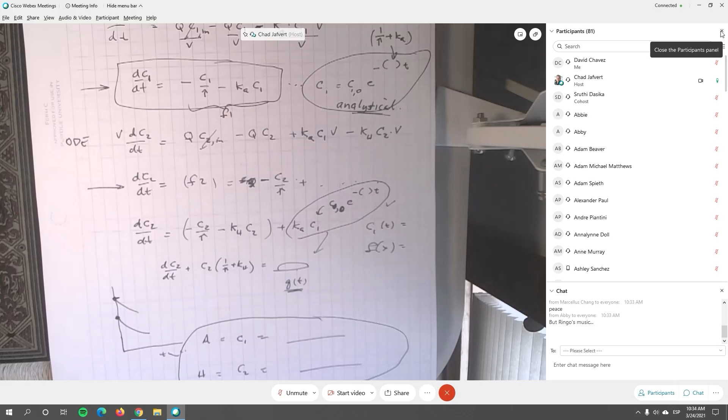We went over basically how to do the homework. We almost took two days to do it, but I wanted to ask if you guys have any questions about that before we continue. If you got any homework questions, I can answer them today before we get going. Anybody? I'll give you a minute if you're writing in the chat box.

You guys learning anything in this class? Yes. Yeah. Yes, that's a good sign. Okay, that's good. So I am teaching you guys something.

A lot of Excel stuff. Excel is very useful. You will probably, if you're working, doing any kind of data analysis, but even just calculations, you may end up using Excel a lot.

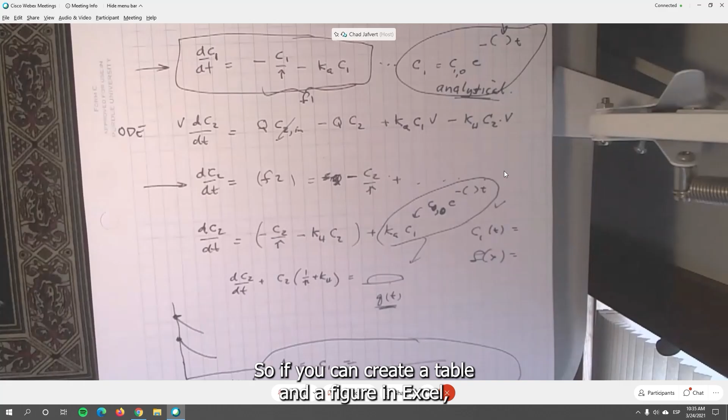The other thing you do as an engineer a lot is write. You have to write technical reports. If you go into academia, you have to write papers and other things, but you're always explaining what you're doing, and so you end up writing a lot and creating figures and tables and all of this stuff. So if you can create a table and a figure in Excel, you can export it into a Word file easily as long as you've created it the right way.

So a lot of what I've been trying to stress is presentation of data, so that you are good at that, because in engineering, that's a lot of what you do is presentation of information so that others can act on it.

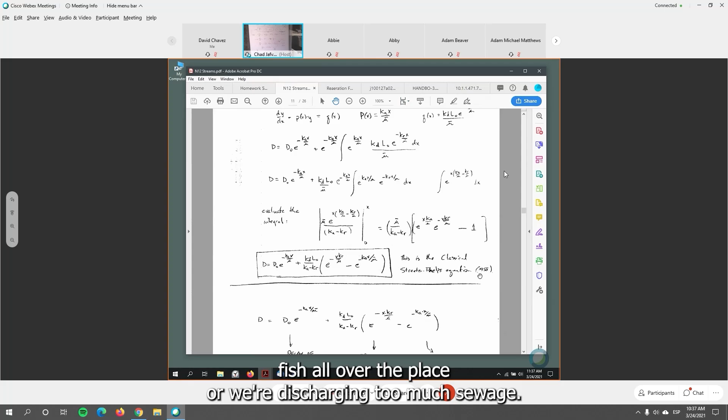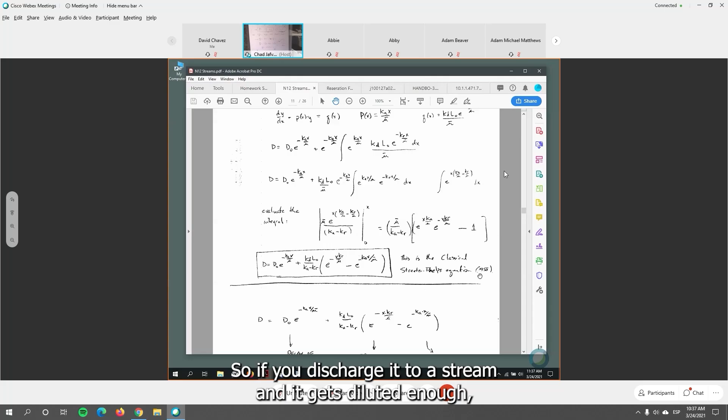And at that point, they had primary treatment plants. Primary treatment is just settling the solids that are in the wastewater, and the remaining water still has maybe 100 milligrams per liter BOD. So if you discharge it to a stream and it gets diluted enough, it may not kill any fish, but it's still not that great because it still stresses the environment quite a bit.

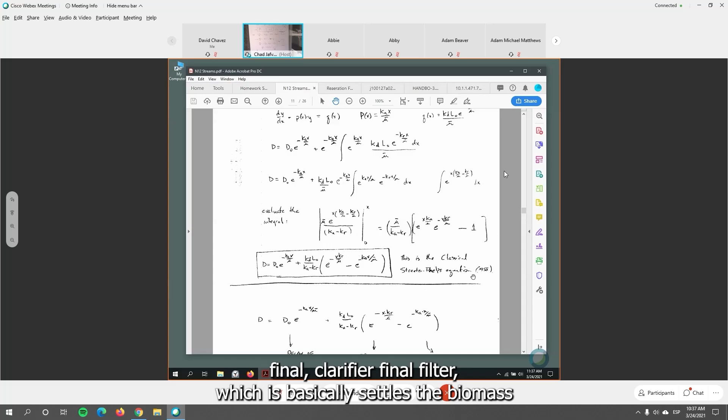So after the Second World War, that's when we started building secondary treatment plants with activated sludge to process it, and then a final clarifier, final filter, which basically settles the biomass, and then the water comes out fairly clear. It's still not completely treated because you can still have pathogens in it.

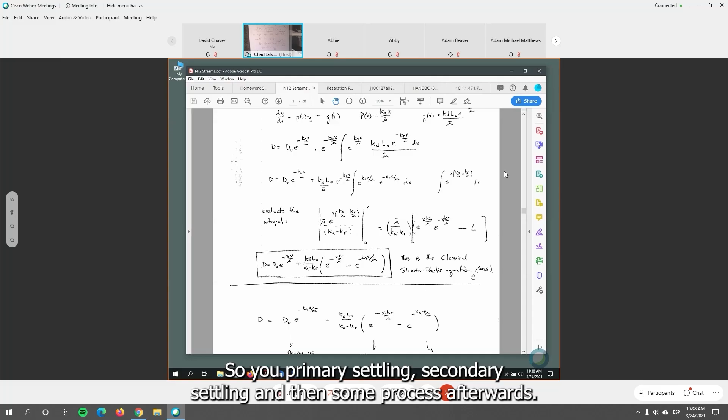So tertiary treatment is where you now disinfect the water or do some other treatment past just the secondary settling. So you have primary settling, secondary settling, and then some process afterwards. And now we have advanced wastewater treatment plants where we can even put reverse osmosis on as a final stage and then reuse that water for some purpose. In some cases, it can even be re-drinking the water that was wastewater.

What's the ad for Ivory soap? Anybody know? The original ad for Ivory soap. Let me Google. How do you spell ivory?

Purity. Ivory soap. Here we go.

The original Ivory bar soap was developed in 1879 by Harley Procter. It was developed with pure and purposeful ingredients, meant to be a staple in the home and mild enough to use as a whole family.

Ivory was pure, 99.44% pure to be exact. For years, they marketed this soap as being so pure because it's 99.44% pure. Remember that number.

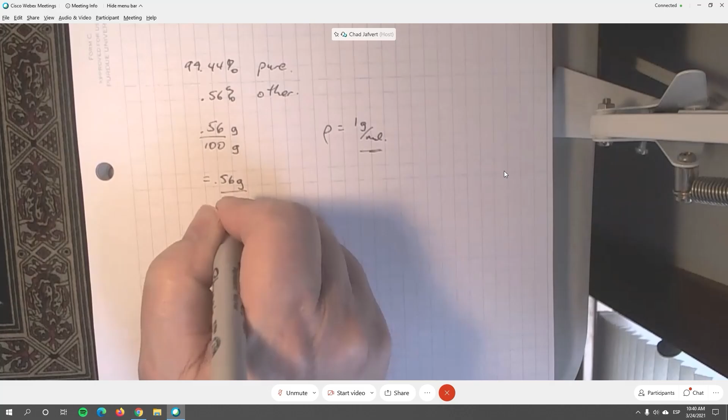That's 0.56 out of 100 grams, or if we know that the density of water is 1 gram per milliliter, we know this is 0.56 grams of other substance per 100 milliliters of soap or of water. Right now I'm saying let's convert this into a liquid phase, into a water phase.

If we had that much impurity in water, how much would it be? Well, in water, we would have 0.56 grams per 100 mLs. That's 5.6 grams per 1 liter, because there's 1,000 milliliters per liter.

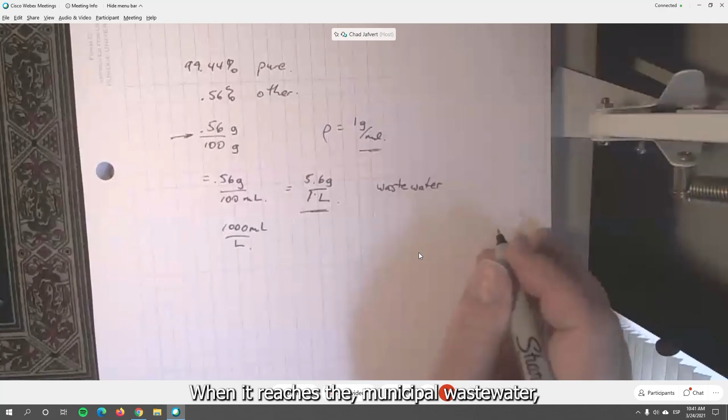So wastewater, when it reaches the municipal wastewater treatment plant, is typically 200 milligrams per liter as BOD. It's also typically 200 milligrams per liter as suspended solids, SS. So 200 milligrams per liter, look at the difference there.

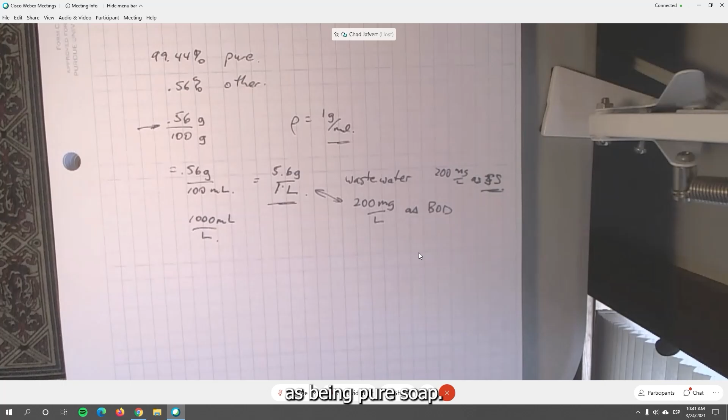It's kind of amazing because you think of Ivory soap as being pure soap. It's got some crud in it. It's got more crud in it than wastewater has waste in it.

As environmental engineers, we are working with trace quantities often. This is milligrams per liter. We're trying to get this down to about 10 milligrams per liter before we discharge it to the river.

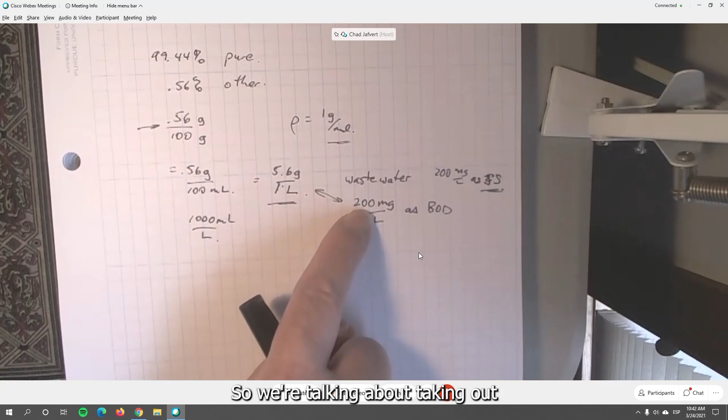So we're talking about taking out almost all of this BOD out of the water. Not quite all of it, but, you know, and in fact, our new phosphorus regulation is 1 milligram per liter, or 0.1 milligram per liter as phosphorus.

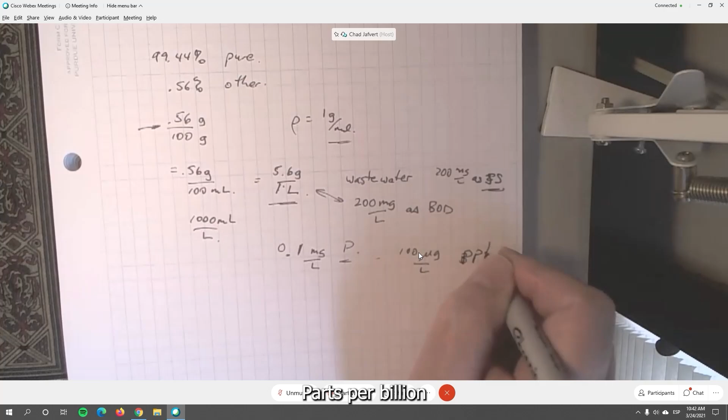We're talking, this now is 100 micrograms per liter, which is parts per billion. Milligrams per liter are parts per million, right? A milligram per liter is a part per million. Microgram per liter is part per billion. So that's 100 parts per billion.

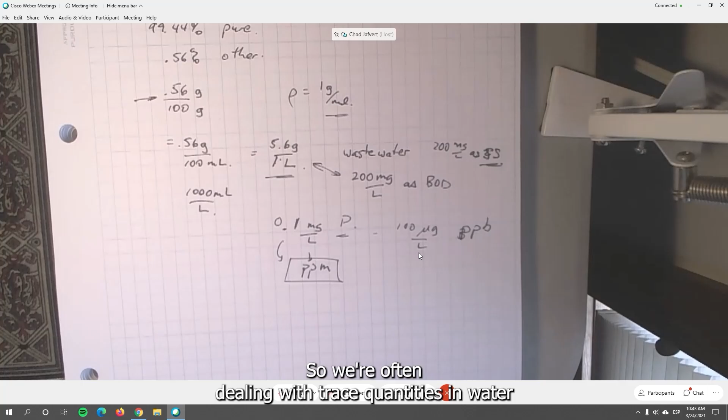We even go down to hormones in the environment that are nanograms per liter. And at those concentrations, they have effects on fish and other animals in the water. So we're often dealing with trace quantities in water that still can create problems.

So 200 milligrams per liter, yeah, that's actually quite a bit, but it's actually not as much as impurities in Ivory soap, which is claimed to be 99.44% pure.

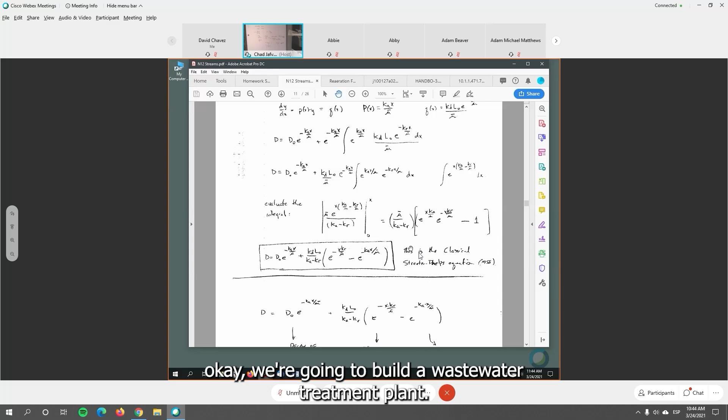So here, this equation, why was it developed? Because in science, the question is always, okay, we're going to build a wastewater treatment plant. How big do we need to build this plant? How much do we need to remove? What do we need to get the BOD down to?

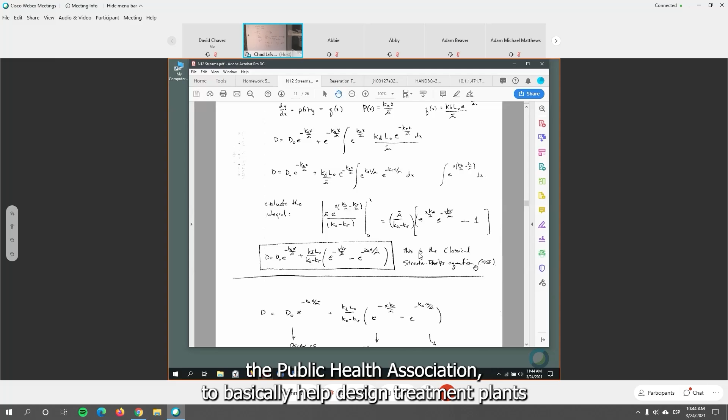And it comes back to this deficit question. How much deficit can we allow in the stream before we start killing fish or affecting organisms? So this equation becomes our first water quality model. It was the first model used by the precursor of the EPA, the Public Health Service, to basically help design treatment plants.

We say, okay, we have this much sewage going into the stream. This is the flow of the stream. This is the flow of the pipe of the sewage going into the stream. If we reduce our BOD, our L naught, going into the stream to this point, we will not create a large deficit in the stream.

And we can regulate it now because we have a model that says, hey, L naught affects the value of D. It's a function, D is a function of L naught. It's also a function of reaeration and these rate constants. So we have to estimate these rate constants too.

We also have to know about the flow of the stream, because we're interested in where this dissolved oxygen deficit occurs downstream. This is the classic Streeter-Phelps equation, developed by Streeter and Phelps, who worked for the Public Health Service.

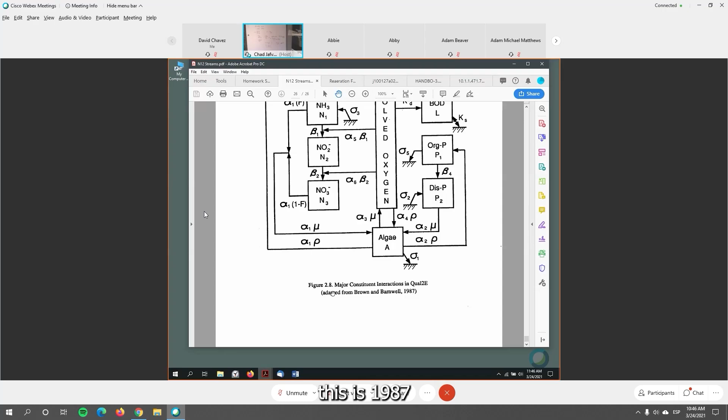Since that time, it's been modified and upgraded to include lots of things. In fact, in this handout on streams, if you go to the very last page, this is from 1987, 'Major Constituent Interactions in QUAL2E,' a river water model developed by Brown and Barnwell. These two guys worked for the EPA, actually in Athens, Georgia.

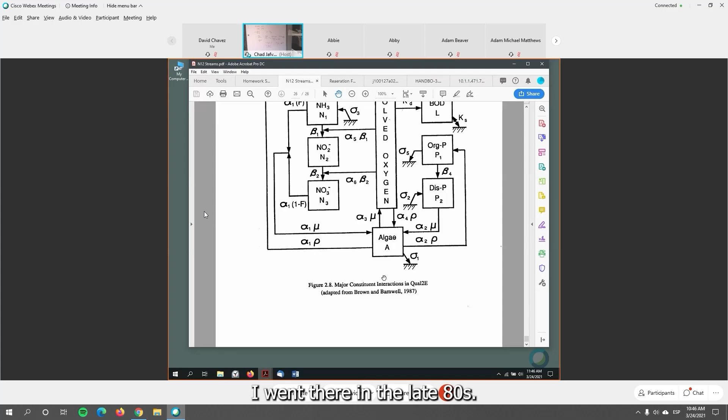They were still there when I got there, in the late 80s. So they were developing this model about the same time I got to the lab where they were working on it. It's basically an EPA model, QUAL2E, that states would use to determine, okay, if we're going to build a treatment plant, how big does it need to be?

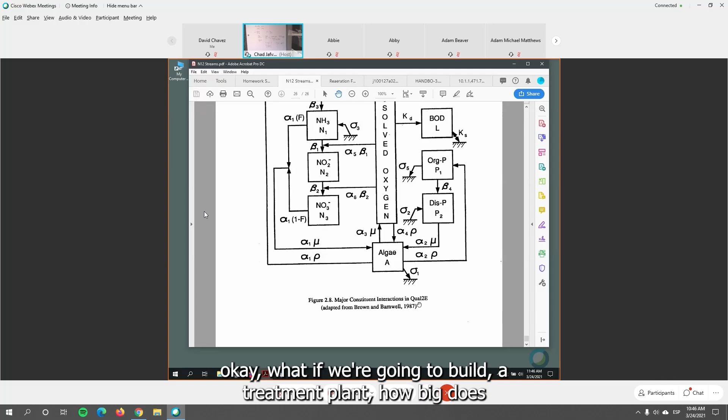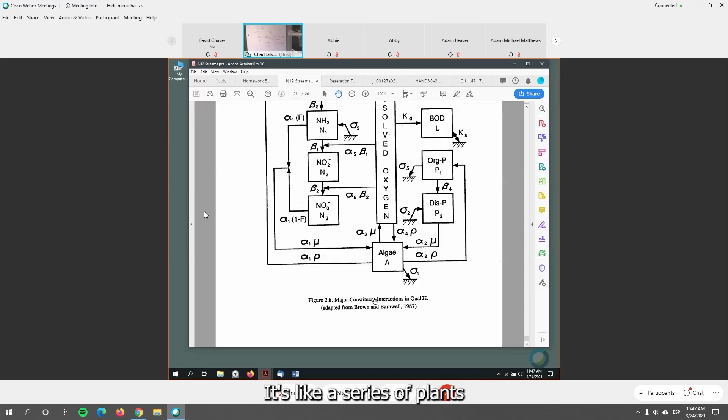It also allows you to do waste load allocation. If you've got 5 industries on a river all discharging to it, how much waste can each discharge? So it's not just one plant, it's a series of treatment plants along the river, and based upon flows and everything else, you can determine how much each one can discharge to the stream.

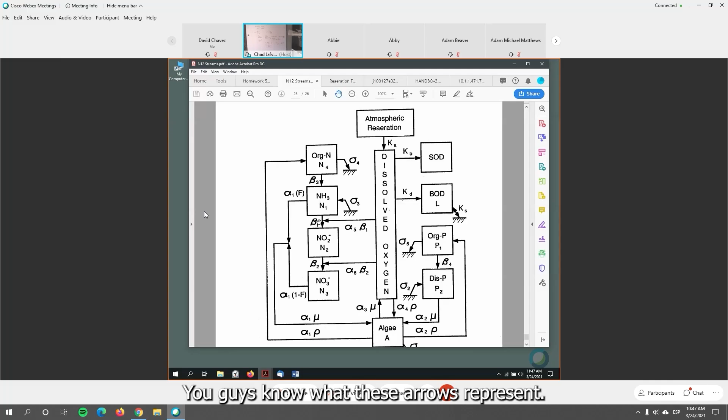If you look at this model, you see arrows. You know what these arrows represent—they represent kinetics. You know what these terms represent, these alphas and betas. They represent factors that affect this rate constant.

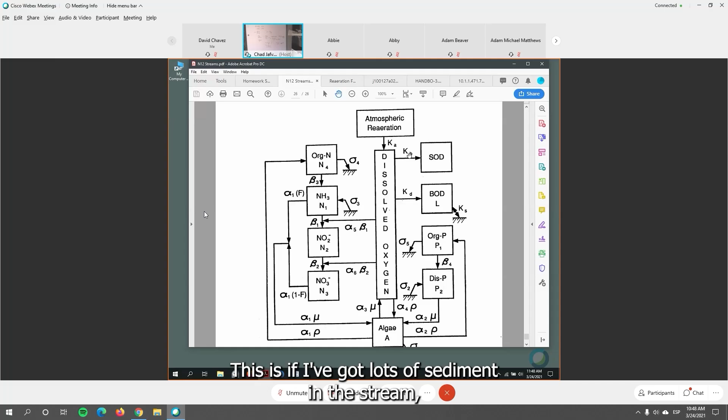Over here you've got some simple ones you already understand. KD is for BOD, biochemical oxygen demand. KB is for sediment oxygen demand—this is not settling BOD, this is if I've got lots of sediment in the stream, those sediments are taking up dissolved oxygen also.

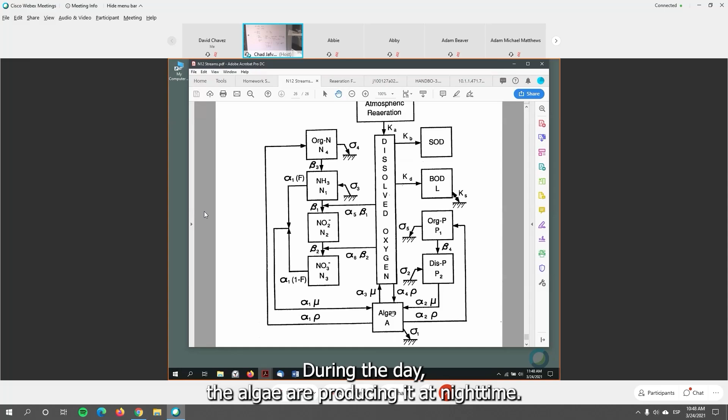Here's algae. They've thrown algae into this model because algae can produce dissolved oxygen, algae can respire dissolved oxygen, and they can uptake dissolved oxygen. So this is a diurnal transfer of oxygen. During the day, the algae are producing it. At nighttime, the net is—these are net because during the day they're both using and producing it—at nighttime they're not producing it, but they're still respiring.

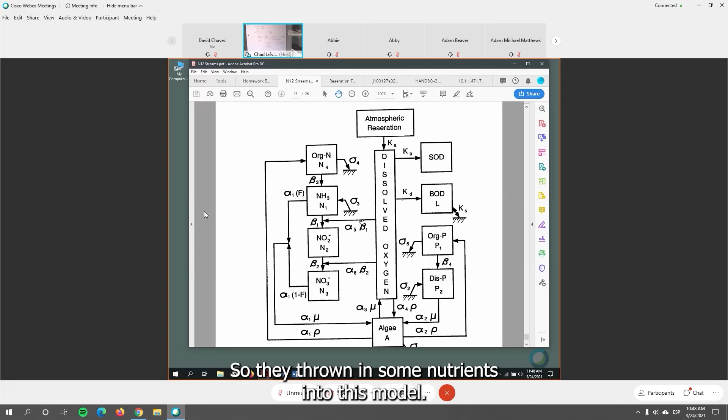Over here you've got nitrogen, over here you've got phosphorus—they've thrown in some nutrients into this model. And atmospheric reaeration, Ka. We've got Ka and Kd in our Streeter-Phelps equation.

The Streeter-Phelps equation is so simple because you only have this term, this term, and then also this term, Ks, which is BOD precipitating out—if it's solid particles, it will precipitate out. So we've got 1, 2, 3 of the rate constants from the Streeter-Phelps equation, only those 3, in this model.

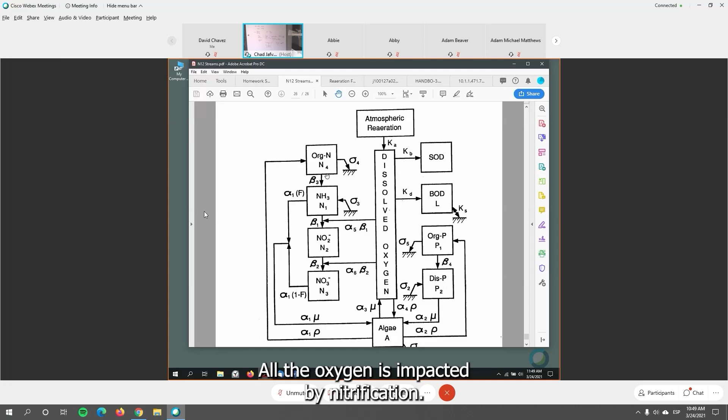But the model includes a lot of other things, because dissolved oxygen is also affected by nitrification, for example. Remember, this is carbonaceous BOD, but over here we've got ammonia being converted to nitrite, being converted to nitrate. These beta 1 and beta 2 are rate constants for that conversion.

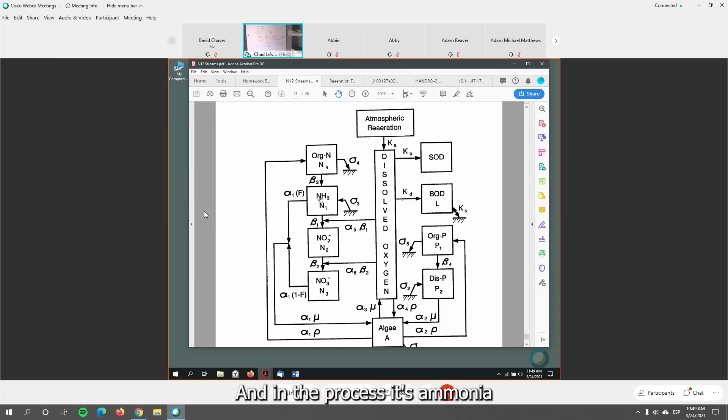In the process, ammonia plus dissolved oxygen forms nitrite. Nitrite plus more dissolved oxygen forms nitrate. And then algae take up the nitrate and grow, algae take up the phosphorus and grow. So algae are growing.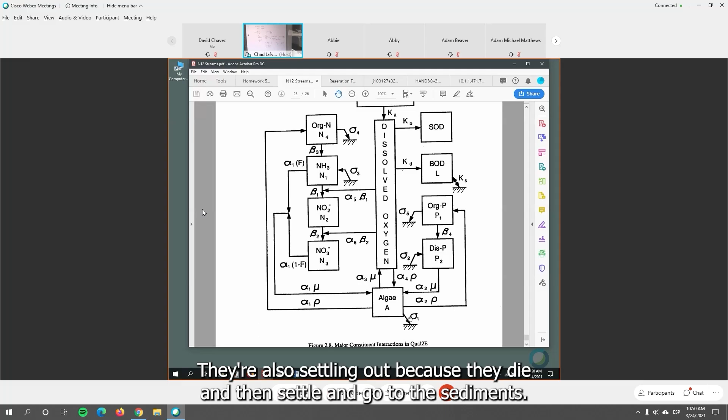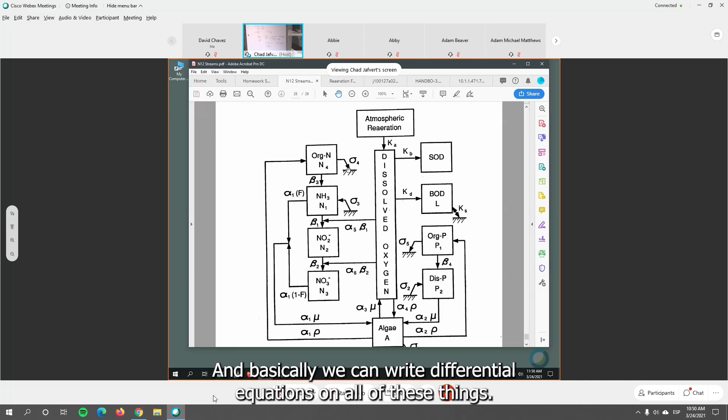They're also settling out because they die and settle, going to the sediments. So we've got a loss term here basically because of algae dying and becoming part of the sediments, the biomass within the sediments, and that creates some of this demand. So you can see this as a little schematic of all these rates, and basically we can write differential equations on all of these things.

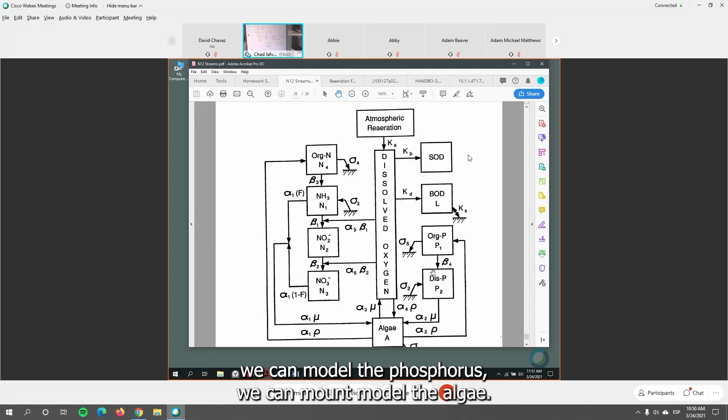So we can take the Streeter-Phelps equation, which has 1, 2, 3 terms, and expand on it to actually model not just dissolved oxygen and BOD—which is what we're doing in the Streeter-Phelps equation—but now we can model the nitrogen, the phosphorus, and the algae.

And in more complex models, let's take a more complex model—I was doing some things here on CAEDYM, Center for Water Research in Australia. Here's a basic model that it does, but it does a lot more fancier things than that. I'm always covering this up.

This is in New Zealand where they're using this model, and it just gives you some information about the model and everything else.

Water Quality Modeling Group, U.S. Geological Survey has a water quality modeling group. They have partners, publications, things like that.

So modeling tools used include this, Sparrow, Prism. You get the idea. There are all of these models that people have developed.

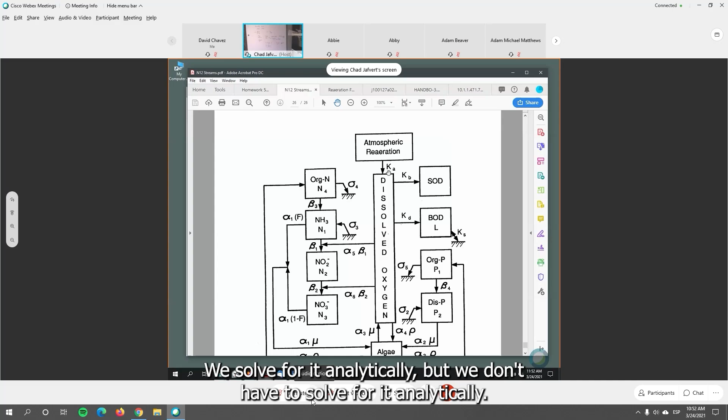If you understand the basic structure of these models—and that's why I've been going through Streeter-Phelps—because we've got three rate constants here, we solve for it analytically, but we don't have to solve for it analytically. We can solve for it numerically.

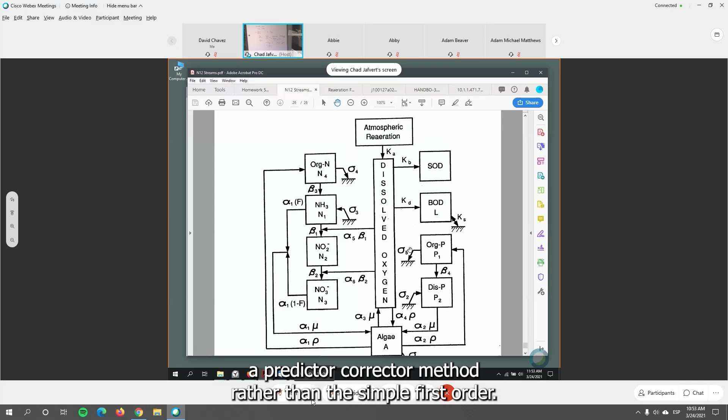Once you get a model that is this large, you don't solve for it analytically. You have to write numerical code and solve it using a numerical method for ordinary differential equations—something like Euler's method, but probably something more complex, because you may want to use a predictor-corrector method rather than the simple first-order approach. Euler's method is basically a first-order Runge-Kutta method, and sometimes people use fourth-order Runge-Kutta methods and other things.

So there are all of these classes you can take on numerical methods, even if you're into all of this modeling stuff. Okay, let's go back to this CAEDYM stuff.

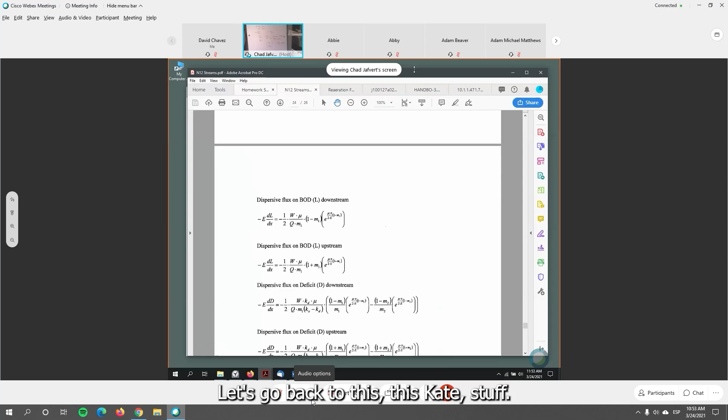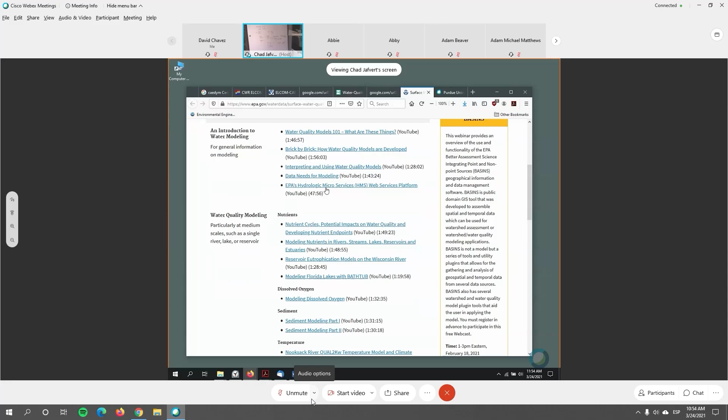Here's EPA's site for surface water quality modeling, and they do training on this. You can spend a day learning how these models are developed, data needs for models, nutrient cycling, potential impacts on water quality, developing nutrient endpoints, and modeling Florida lakes with Bathtub.

That's a clever name for a model—Bathtub. There's also dissolved oxygen modeling; these are actually YouTube videos you can watch. And sediment models—they have models just on the cycling of nutrients and contaminants within sediments.

WASP is a model—it's a water quality assessment, I think for lakes, though I'm not quite sure, I can't remember. SWAT is a model that was actually developed in our ABE program, but it's a different kind of model because it's mainly a routing model that also accounts for solids running off and things like that. So it's mostly hydrologic.

HSPF is a model—these are watershed models rather than just individual stream models. A lot of these are for stormwater management, like SWMM, which is basically water routing rather than nutrient or other processes. Anything with 'Qual' in the name, like Qual2K or Qual2E, are water quality models, not necessarily assuming constant flow.

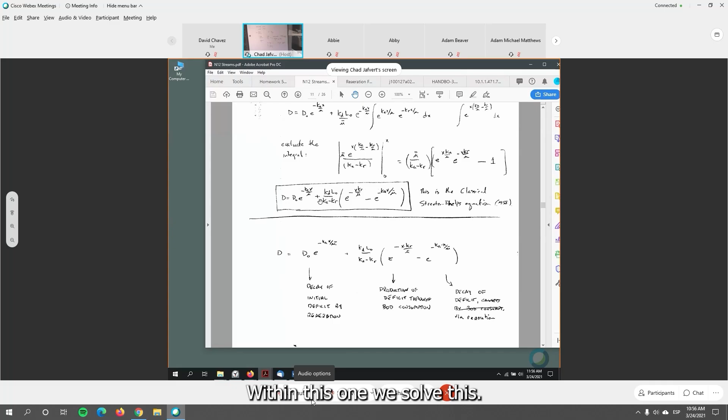We solve this—this is the analytical solution to this problem. We could go back up here and take the two basic equations, on L and on D. Where's my D equation? On D, this one—and we could solve them numerically using Euler's method or anything else we wanted to.

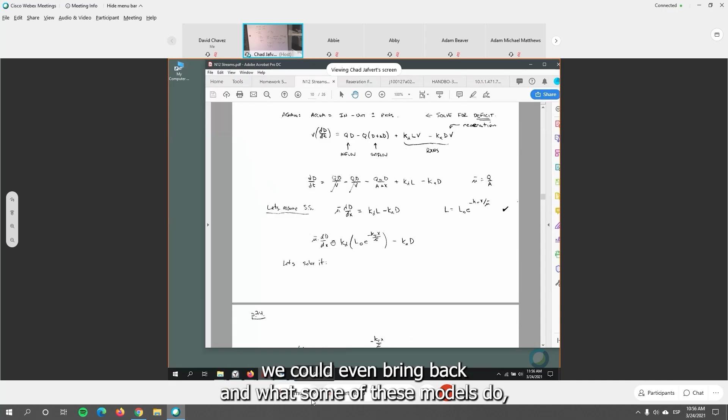We could even bring back, as some of these models do, the fact that it's a function of time and a function of distance, so we don't necessarily have to have a constant input. We could make this a partial differential equation: the change in deficit with time and the change in deficit with distance along the stream reach.

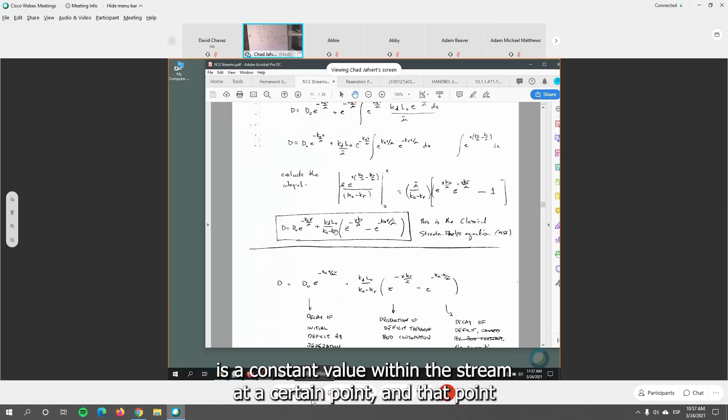Streeter-Phelps, again, assumes steady state. That means they're assuming L-naught is a constant value within the stream at a certain point, and that point is a discharge point where water is being discharged to the stream—because you're assuming an industry or a wastewater treatment plant is putting in about the same load of BOD into the stream on a daily basis.

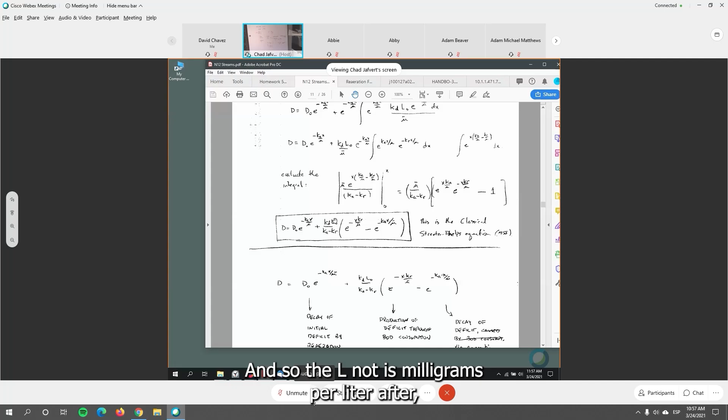Okay, so the L0 is milligrams per liter after it's mixed and everything else within the stream.

So this equation, this is the decay of the initial deficit. This is production of deficit through BOD consumption on the waste that you're discharging, on the L0 that you're discharging. And then this is the decay of the deficit because of reaeration from molecular oxygen in the air going into the stream. So we need the reaeration coefficient, we need Kr, we need Kd.

So evaluating the constants, we can get some from field data, we can interpret and get KD from bottle if we do BODs in the lab. The literature Ka, and in your notes now I've added this, which are reaeration formulas.

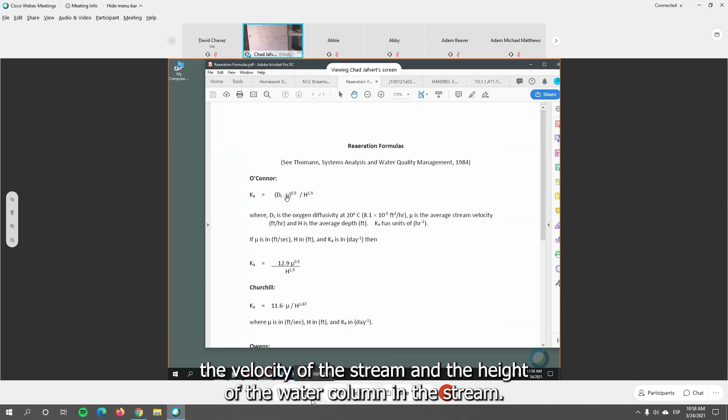These are older formulas, but they haven't changed much because O'Connor Ka, the reaeration rate constant, is a function of the oxygen diffusivity, the velocity of the stream, and the height of the water column in the stream. This is like the average height of the water in the stream, to the 1.5 power.

So this is an empirical equation. Even though the units all work out here, as long as you use the diffusion coefficient in feet squared per hour, mu is the average stream velocity in feet per hour, and then the height is in feet. So if you calculate this all out, feet disappear from the equation, and you just have per hour. So the Ka is measured in per hour, okay?

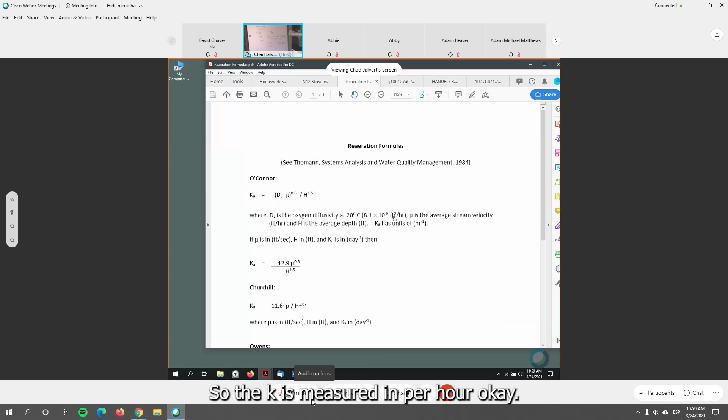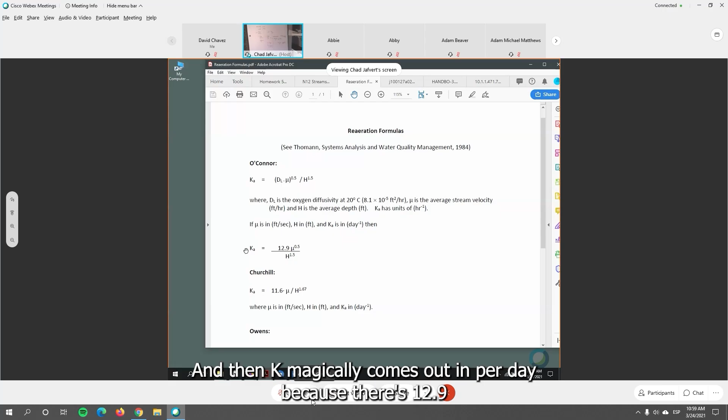And another form where they get rid of this diffusion coefficient by just plugging this number in and rearranging it, you get this, where mu is in feet per second, h is in feet, and K is measured in per day. So you have to plug the number in here for mu in feet per second, plug in the height in feet, and then Ka magically comes out in per day, because this 12.9 has unit conversions on it that are not explicitly given in this equation.

So you can do this or you can do this. They give you the same value, but just note that this one, hey, the units on here don't agree with the units on this side, because the 12.9 has units that are not written down, okay?

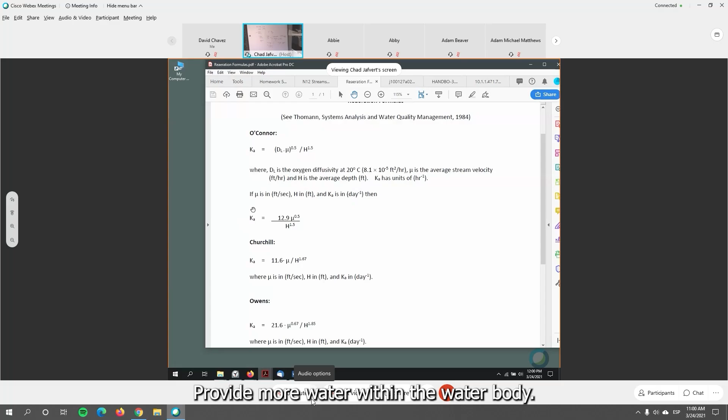Churchill has a formula. You can tell that all of these formulas are about the same. The higher the velocity of the stream, the higher the Ka value. More reaeration if the stream is moving faster. That's because there's more turbulence in the stream, more turnover, more ability for oxygen in the air to transfer into the stream. The height of the stream then, as the height increases, the oxygen transfer rate decreases, because obviously the thicker the water column, the less transfer I get per volume of water within the water body.

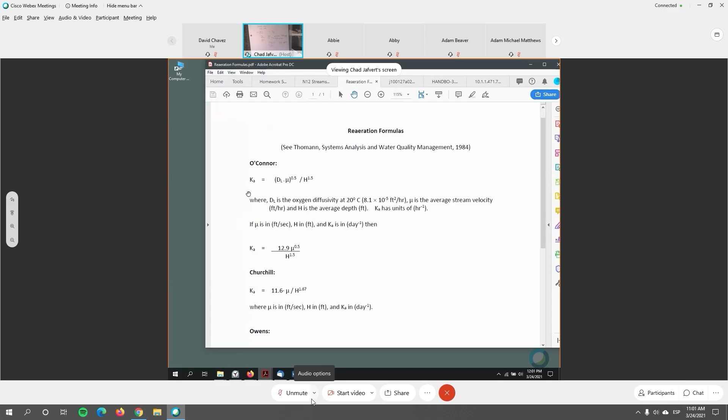So these equations kind of make sense. Where you get large Kas and it's hard to model is over dams, because if I've got water flowing over a dam, you get tons of reaeration at that point because of the turbulence and the entrainment of air into the water and everything else. So low dams that have turbulence in them are very, very beneficial to transfer oxygen into the stream. Or if you've got a steep mountain stream where you've got water going over rocks, obviously you've got a huge Ka.

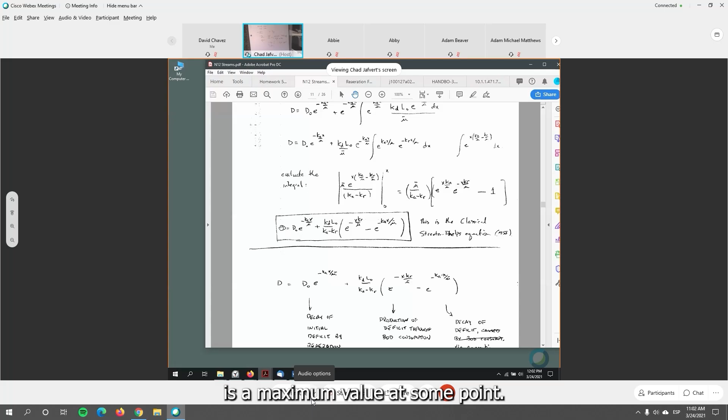Now, DC here, the deficit with a subscript C means a critical point. Because at some point, our deficit curve, if we don't have a good water treatment plant, this deficit reaches a maximum value.

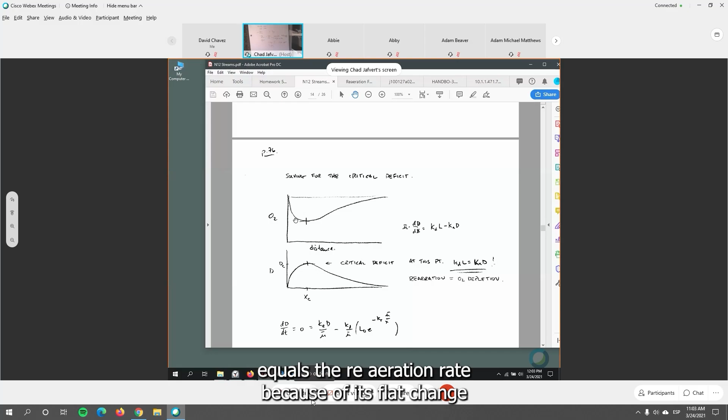Let me see if I have a graph. Yep, I do. This is our oxygen solubility curve. If we've got waste coming in at this point, downstream from that distance, our oxygen is being consumed the whole way. The oxygen in the stream keeps going down and down until eventually the oxygen consumption equals the reaeration rate. At this point, the deoxygenation rate equals the reaeration rate because it's flat. Change in oxygen concentration over change in distance is 0 here.

If we go up to our original equation here, where is it? This equation right here, if the change in deficit over the change in distance is 0, that means this term equals this term, which means also up here, this term is 0. Change in deficit with distance is 0, which is at the minimum value of that line. That means the rate of BOD utilization, KD times L, is equal to the rate of oxygen reaeration, which is Ka times D.

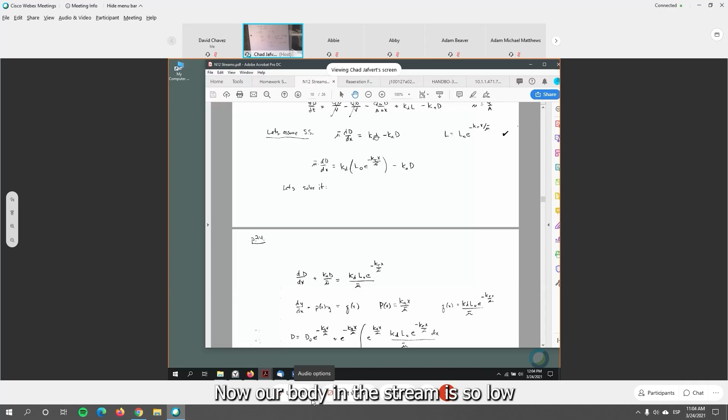So this is oxygen consumption, this is oxygen production through reaeration, and so this term equals this term at that point. Beyond that point, reaeration is greater because our L is so low now. Our BOD in the stream is so low that we don't have much of this occurring anymore. We still have some of this occur, we still have reaeration occurring, and our stream is recovering at this point because most of the L has been consumed. We didn't plot L, but if you remember, L is just a first order decay as a function of distance in the stream. So at some point it gets really low, and that's when reaeration kicks in and our oxygen concentration in the stream goes up.

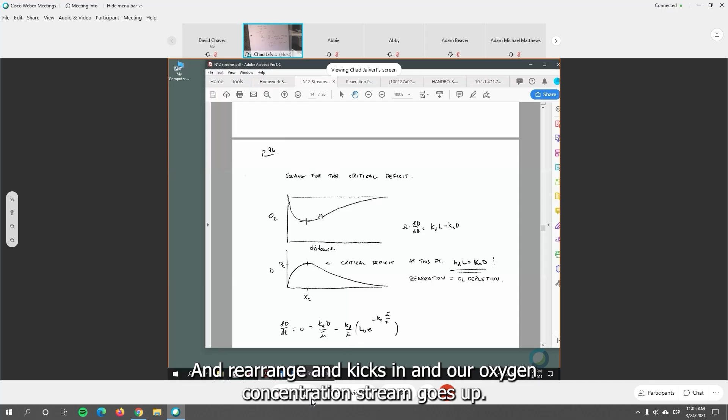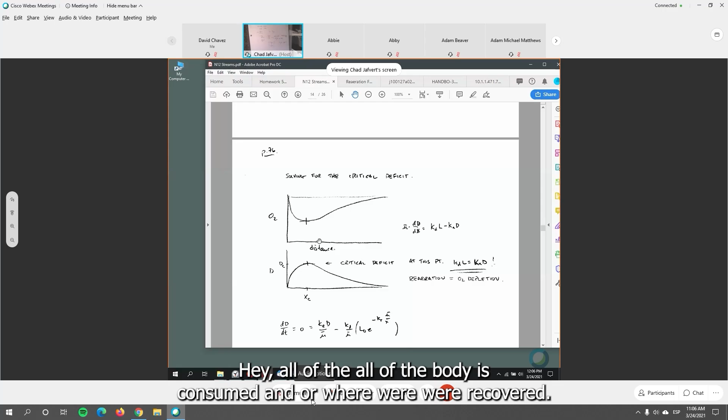So this curve is known as an oxygen sag curve as a function of river mile or distance downstream, and this is a critical distance. This is the point we're interested in, because if this is too low at this point, we get fish kills. So you don't get fish kills right where the water is going into the stream. You get the fish kill downstream after a lot of the oxygen has been consumed and taken out of the river. So it's downstream you have to worry about. Further downstream, all of the BOD is consumed and we're recovered. Our stream is recovered. So this is oxygen sag.

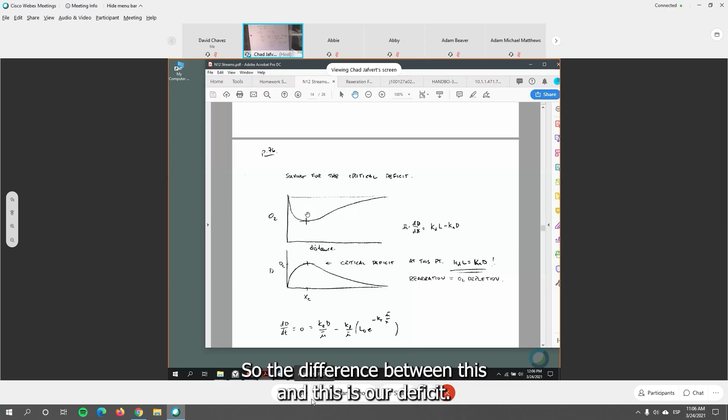Remember, the deficit is the difference between the saturation value, this line, and this line. So the difference between this and this is our deficit. We can plot the deficit as a function of time, and the deficit has a maximum value. So this CD is the critical deficit. Critical deficit at this point is where this is equal to this. Again, reaeration equals oxygen depletion, and it's at that point.

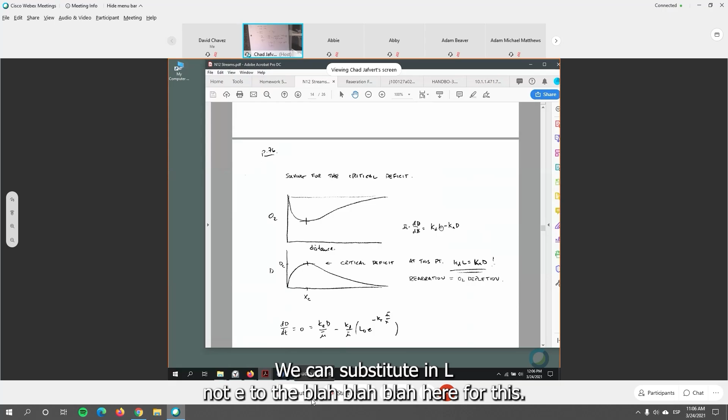So now we can sense the critical deficit is equal to this point because we can rearrange that. We know that this term equals this term. We can substitute in L naught E to the blah blah blah here for this. That's what we've done, and we've rearranged it, brought the Ka, which was multiplied here, over. And now we can define the critical deficit point as being equal to this term.

We also know that the deficit is equal to this term, so we can set these two equal. Where does our critical deficit equal our deficit? Well, where this side of the equation equals this side of the equation. Set equal and solve for, and to do this, we're basically getting rid of D, but we still have X. So we have an X here, an X here, X here, X here. We can solve for X, so you do that and you end up with this.

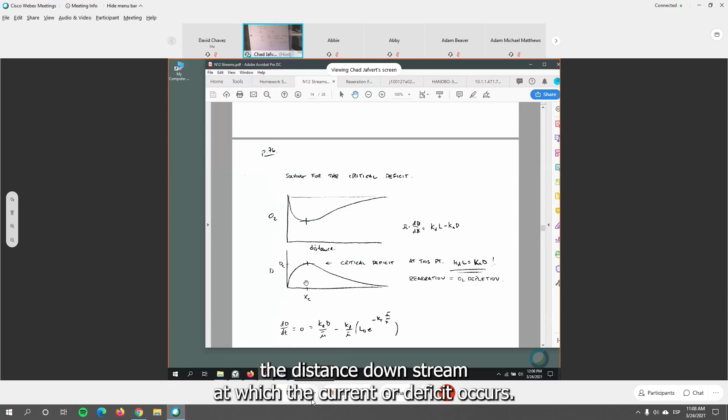The distance, this is the distance of the critical deficit. So now, if we know all of our parameters in our Streeter-Phelps equation, our velocity, our rate constants, we can solve for the place where the critical deficit occurs, XC, the distance downstream at which the critical deficit occurs. Well, if we know that point, we can plug in that value of X and solve for the deficit, which is now the critical deficit, because it occurs at the distance where the critical deficit occurs. So we can simply substitute back in now to solve for the critical deficit, and we will get this value here.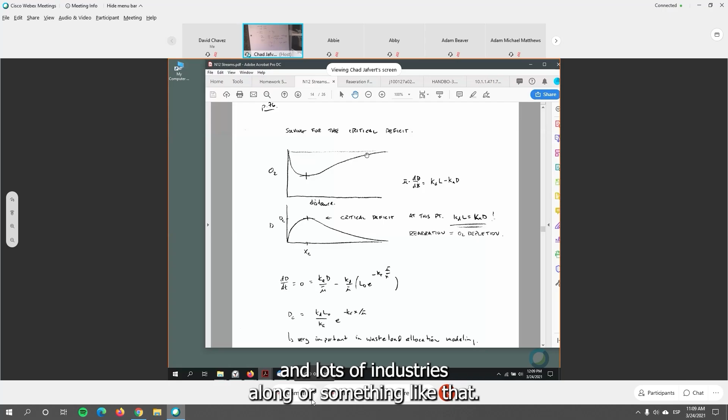Typically now with water quality models, we don't have to worry about this because the regulations on discharge of BOD to rivers are stringent enough that we don't get a typical oxygen sag curve in rivers, unless you've got lots and lots of industries along them or something like that. But the treatment is such that now we're worried about emerging contaminants and other problems, pathogens too, and that's why we have disinfection rules now in wastewater treatment plants.

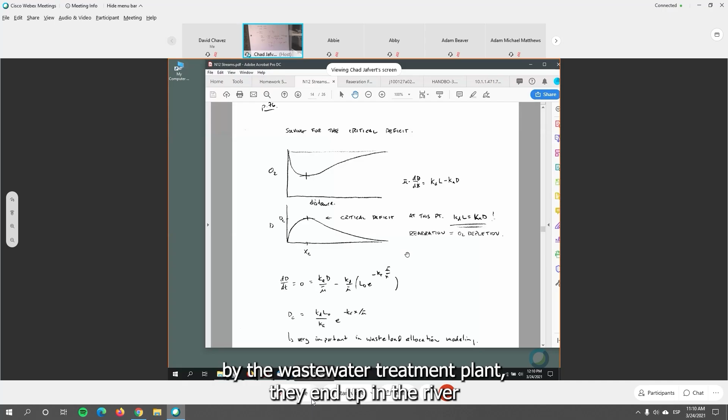We used to not have disinfection rules. That's a new thing over the last decade or so, where you have to disinfect the water before you discharge it to the stream. Now people are worried about hormones and pharmaceuticals and other things in the water, because the water coming into a municipal waste treatment plant is contaminated with all of it. People are taking medicines, and those medicines go through your body, end up in the toilet. You flush the toilet, they end up at the waste treatment plant. Now you've got all of these pharmaceutical chemicals, including hormones, that if they're not removed by the wastewater treatment plant, end up in the river and can affect organisms in the watershed.

There's a lot of papers lately on that, not just on oxygen. The problem used to be oxygen. Now it's these nanogram and picogram concentrations of chemicals that people are worried about, that have effects at those levels.

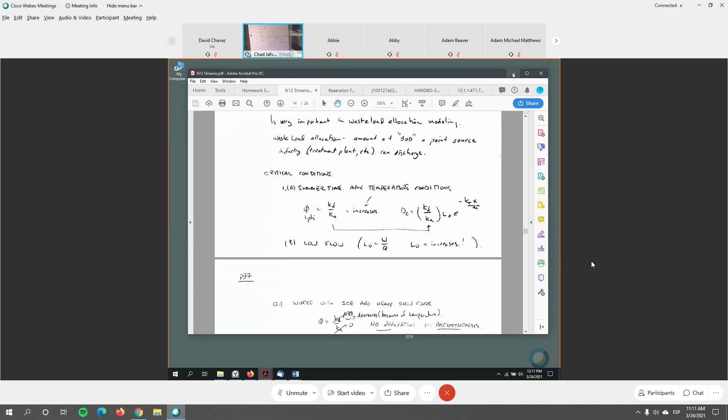Critical conditions: summertime, maximum temperature conditions. I'm going to show you a paper because we have about 9 minutes left, if I can find it.

Here's your homework. Let's go back up here to Wiener. This is supplemental—where's the other paper? This is time series, I don't want time series, I want this one. Come on, where's the paper? It's 2016. Here it is.

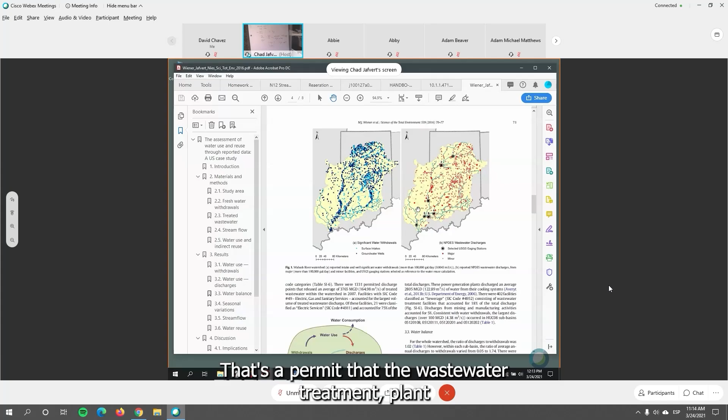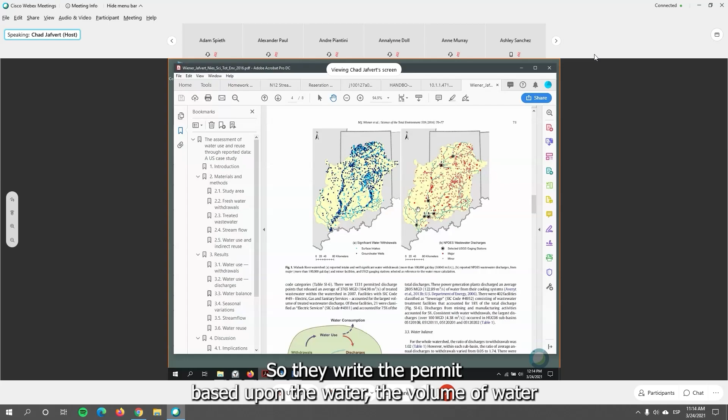So here are all of the significant dischargers that you have to let them know about, and you have to get a permit. The permit is what the wastewater treatment plant gets to discharge BOD, suspended solids, certain pesticides, pH—in other words, the water has to be between a certain pH range, you can't discharge acid to the Wabash River. So they write the permit based upon the volume of water you're discharging, and where and in what water stream you're discharging it to.

So they have to look at all of the discharge points here and do waste load allocation. How do they do waste load allocation? They run a model to say, if all of these plants are discharging water to this stream, our stream won't be affected because we've restricted what each of these plants can discharge to the Wabash River.

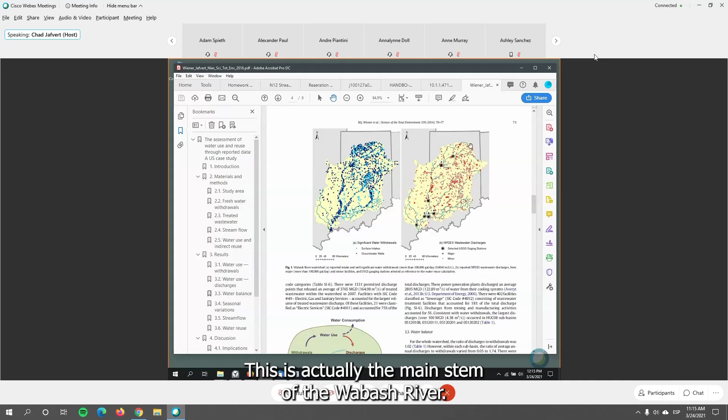This is actually the main stem of the Wabash River over here—it actually is this one. It goes all the way over to Ohio, comes down, and for a while is the border between Illinois and Indiana, right in this range. What she did was she compared these withdrawals from the watershed to these discharges to the watershed, just to see what the mass balance looked like.

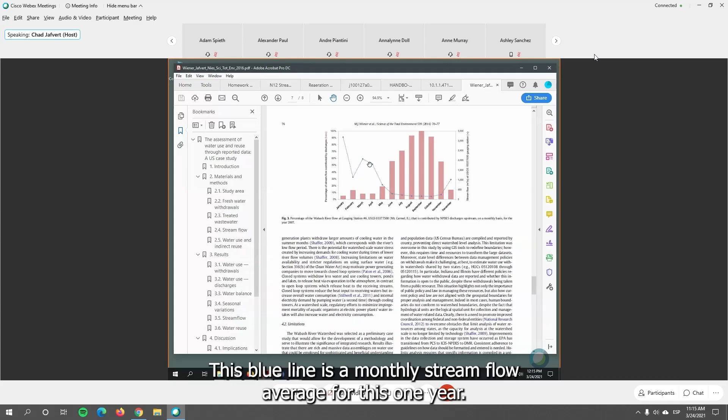And what you see is in the summertime, she got flow data from the USGS. Here's stream flow on this side. This blue line is a monthly stream flow average for this one year.

You can see in August, September, October, the stream flow is very low. January, February, this varies by month or by year too. But we have March and April rains here. Look at how high the stream flow is. It's high, and this is at the discharge point.

This blue line is at the discharge point for the Wabash River. So the flow in the Wabash changes daily, depending on how much rain we get. There's always some base flow in the river. Even if we don't get rain for a month, groundwater infiltrates into the river, so there's always water flow into the river. In fact, the river is essentially the groundwater level, because you have water under the banks. If you dig down, you'll be right about the water level of the river. So think of the river as an outcropping of the groundwater.

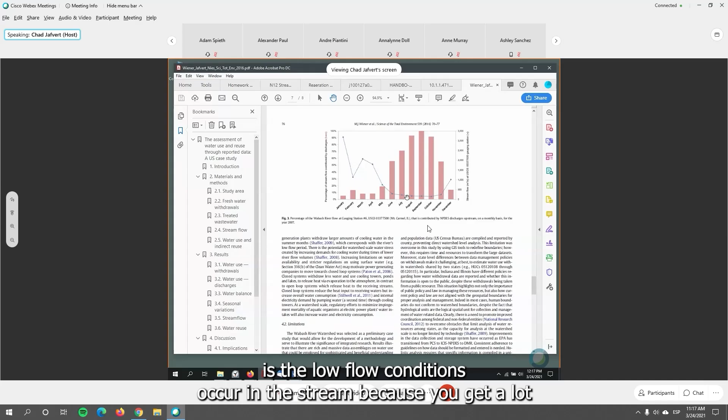But you can see in the summer we have low flow conditions. This is typical of most streams in the US, because you get a lot of evapotranspiration off of the farm fields. You don't have as much runoff off of the land in the summer as you do in the wintertime. In the wintertime, even in January, sometimes you get frozen ground, so if it's raining, that water goes directly to the stream.

March and April is typically our rainy season, so we end up with very high stream flows in spring and winter months, and then in summer it goes way down. So where do we worry about discharging waste? It's in the summer months. That's when it's critical, because if we've got lots of BOD coming in, there's not much water in the river, and that's where we can have major contamination issues.

What Julia did here, which is interesting, is this is percent of stream flow contributed by discharge. It goes up to 100% here. That means in September of this year, 100% of the stream flow was because of the discharges. All of these discharges to the river are what's creating the stream flow.

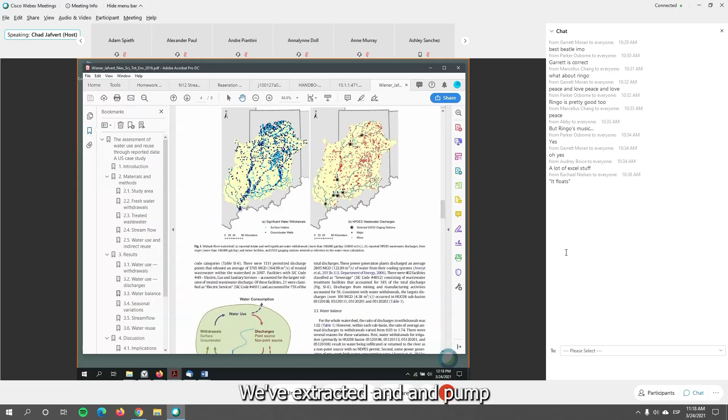So West Lafayette discharges water. We're taking out water, and then discharging the water. So it's not like it's not water from the Wabash River—it's water from the Wabash. We're pumping it out, and then discharging it back into the river. But it means we pumped all of that water. Before it gets to the point where it enters the Ohio River, we've extracted and pumped the water uphill and then let it flow by gravity through the wastewater treatment plant back into the river.

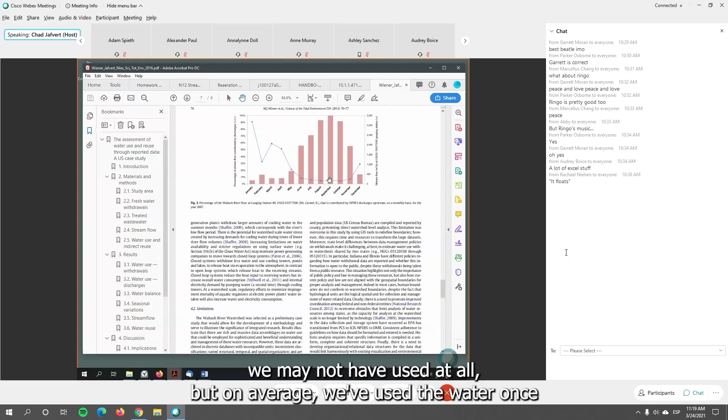We've basically pumped this whole river. The volume exiting here, we basically pumped that whole volume at some point in the watershed during the summer months. We've literally used 100% of the water, okay? Some of that water we may have used twice, some we may not have used at all, but on average we've used the water once in the watershed—in a treatment plant, a drinking water plant, a factory, or something else.

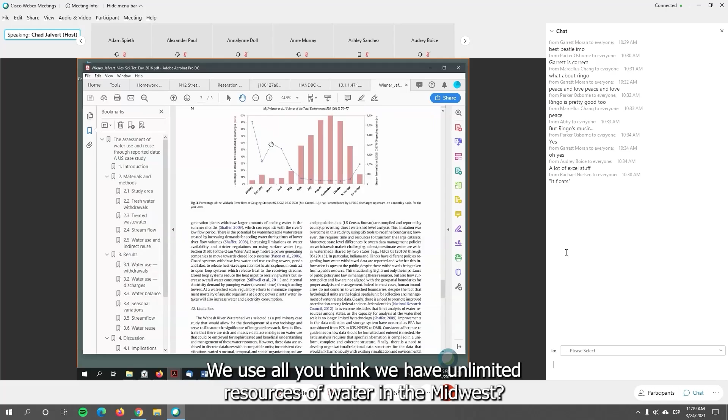Okay, so that gives you an idea. Do you think we have unlimited resources of water in the Midwest? Well, we kind of don't, because we're using it all at least once. If you think about this, then how many times is the water used before it reaches New Orleans? When they're pumping water out in New Orleans, all that water has been used upstream someplace. Okay, so that's my story, and I'm sticking to it.

Any questions? It's time to go. No questions? Okay.